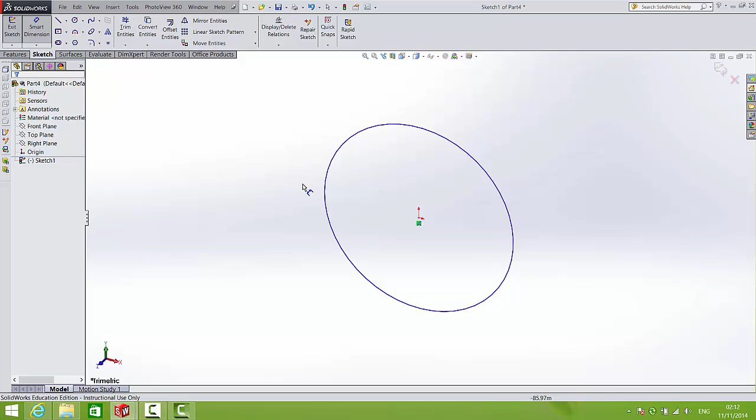So I've opened up a new part and we're going to draw the lid in this part. To do so, we'll draw a circle. Dimension that circle to be 150 in diameter, and we'll extrude that to a height of 35, but with a taper or draft of 2 degrees.

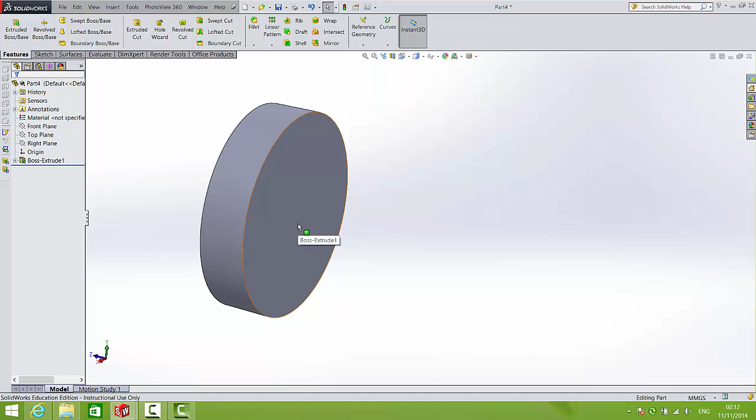So this is the blank for our lid. We want to use a copy of our existing torch and thread to cut the thread in this lid. So to do that, we'll insert the torch with its thread. Go to Insert, Part, and select the torch that you want to bring in.

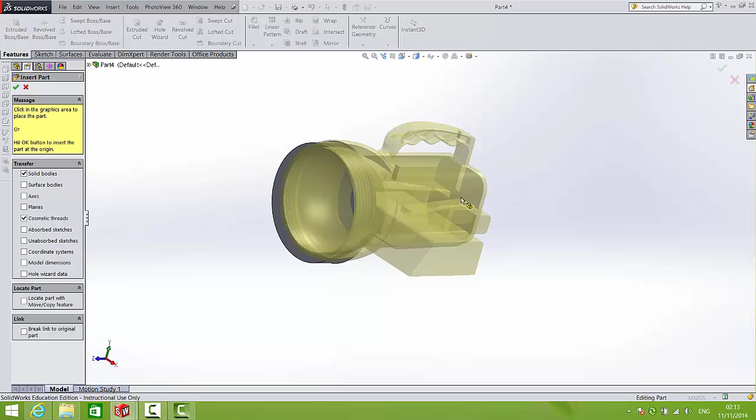If you're very careful, it will snap into position, but you have to be very lucky for it to snap into position, so I tend to just leave it to one side and carefully put it into position. You will notice that all the bodies come in, including the two bodies we used a while ago, but that's not going to be a problem.

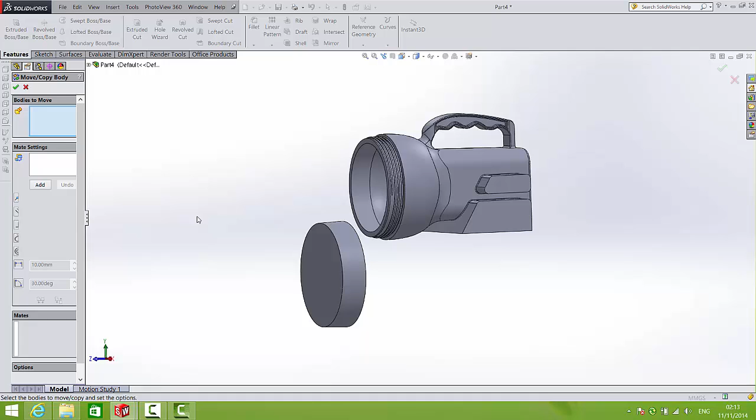So we essentially have to mate these two together. To do that, we will go Insert, Features, Move Copy. First the body to move will be the lid, and the mate settings - by clicking this box, it allows us to apply the mate settings. If you happen to see this menu box, it allows you to move and drag the lid using the XYZ coordinates, but press constraints to go back and apply a traditional mate.

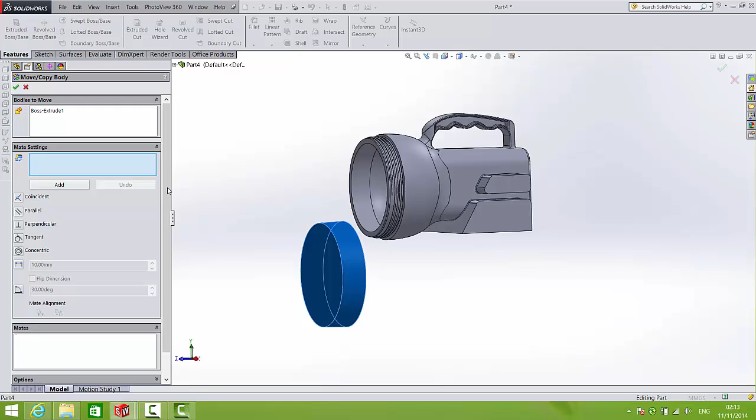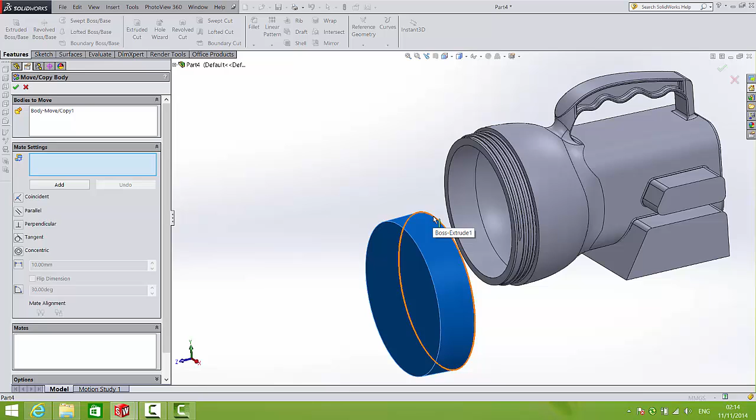So what we can do now is select this face and that face, and they should mate together, which they have done. Now we need to go to the process again, Insert, Features, Move Copy, and now I want to get this body moved, and I will mate the edge of this with the edge of that, and now the torch and the lid have been stuck together.

But bear in mind, this is not an assembly, this is the lid - this is the part called the lid. So I want to cut these solids out of it. To do so, Insert, Features, Combine.

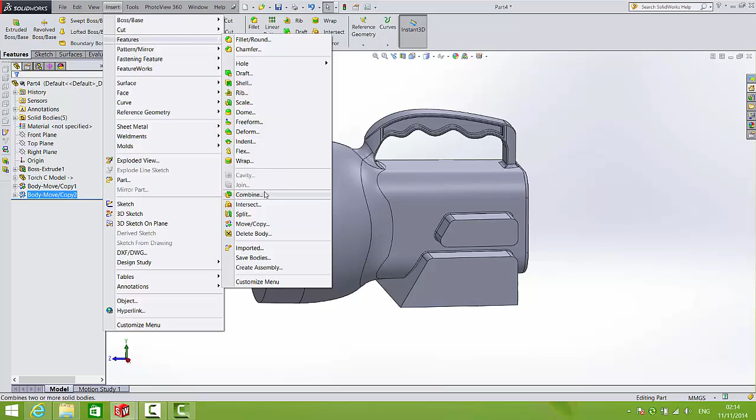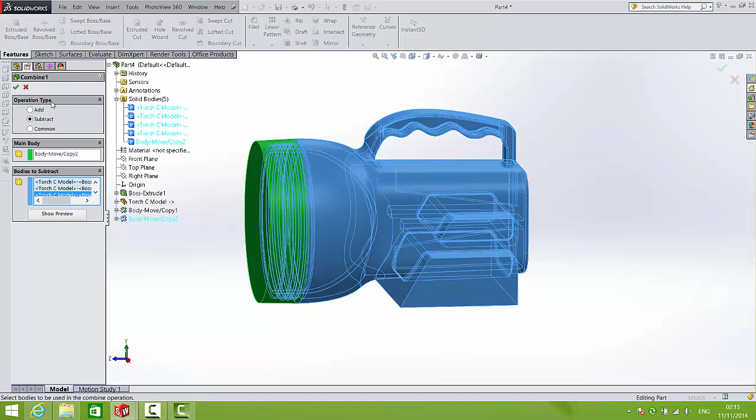I'll make sure it's on Subtract. The main body is going to be the lid, and the bodies to be subtracted will be the main torch. I can't forget these two other bodies as well, and there's the lens inside that I need to remove too. I can't actually click it here, so from the drop down menu I can select the lens within the body. And now if I approve that...

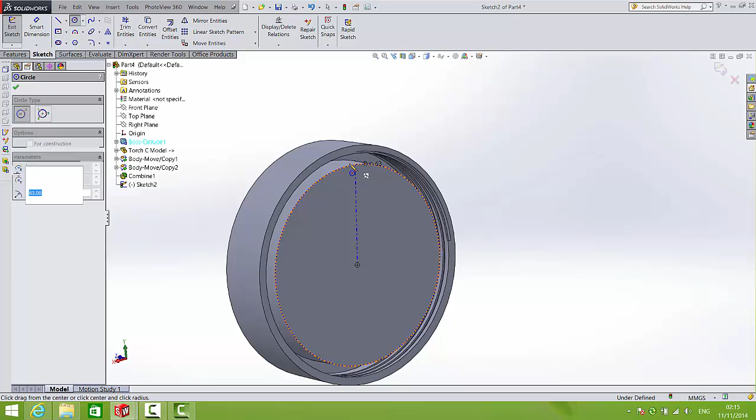I should have the thread, the functioning thread, cut from the lid. So what I'm going to do is create a sketch on this surface of a circle, and I'm going to extrude cut that all the way through.

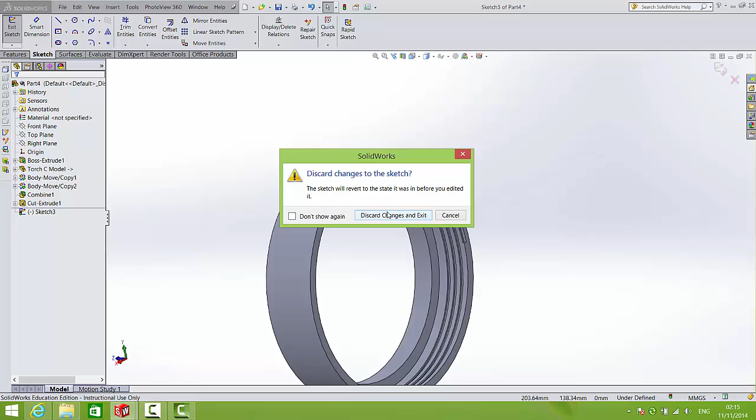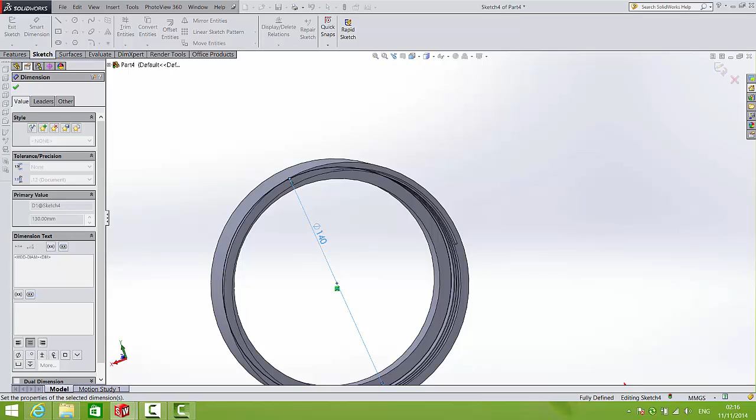Now while I'm at it, I'm going to make a little recess or rebate for the piece of glass. To do that, I will go Sketch, Circle, select this internal plane. That didn't select correctly, so I'll try that again. I'll select the plane first this time, draw a circle on that plane, and let's make it a nice even measurement - let's make it diameter 130. In fact, let's make it 140. See how it looks? 140 is a little steep, let's split the difference - let's make it diameter 135.

And we will extrude cut that to take the piece of glass. Let's say the glass is going to be 3mm thick. There is a little rebate to take the glass.

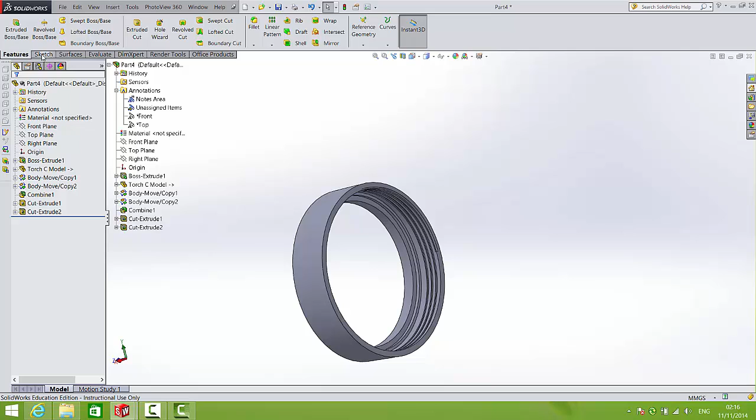And while we're at it, let's draw in the piece of glass. So Sketch, Circle, on the same plane - let's draw the piece of glass there. This time we will extrude it the same distance, but if we want this to be glass, we will not merge the result, and in a few moments' time we can make this body glass.

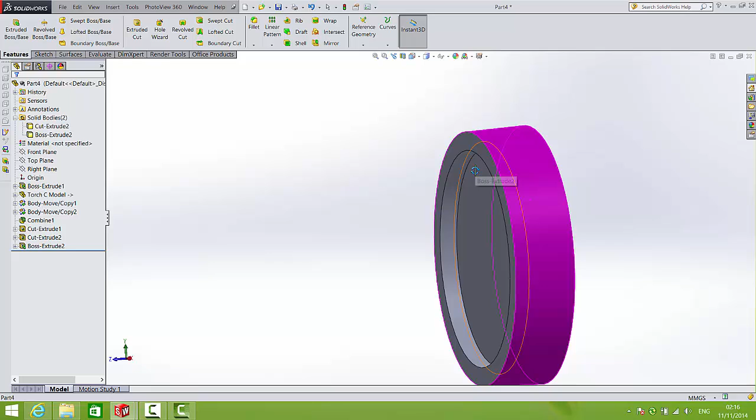So let's put a chamfer on this line here. We'll click chamfer and do a distance chamfer, and let's try a 6 and a 3 and see how that works. Not bad at all.

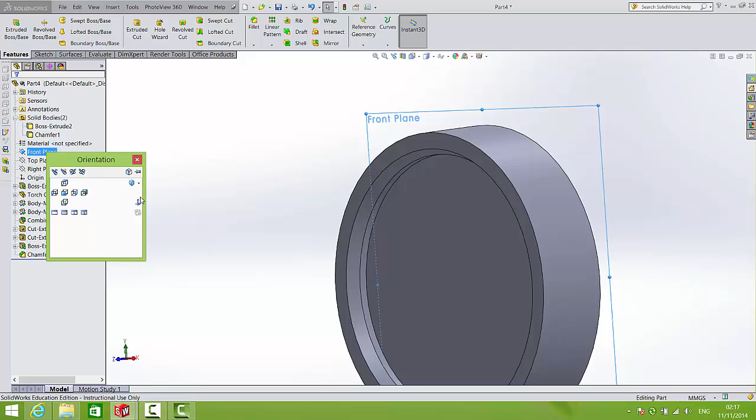And let's just get a little bit of detail up here. So on the front plane - I beg your pardon, it's actually going to be the, let's see where we're at, the right plane. Now no matter, I just notice here that the right plane is shifted. This happens sometimes when you move bodies around, because I moved the lid from the right plane.

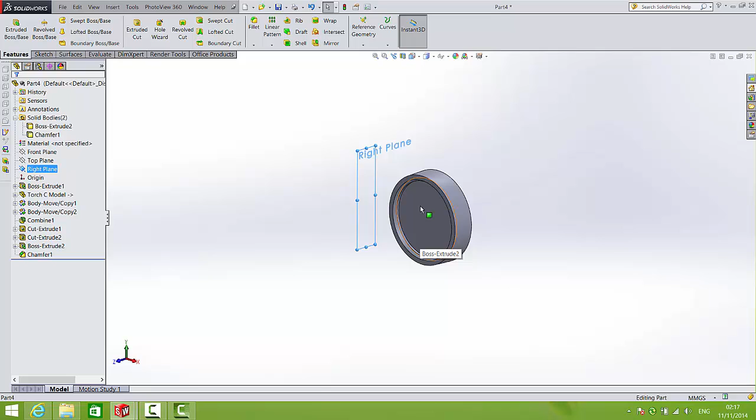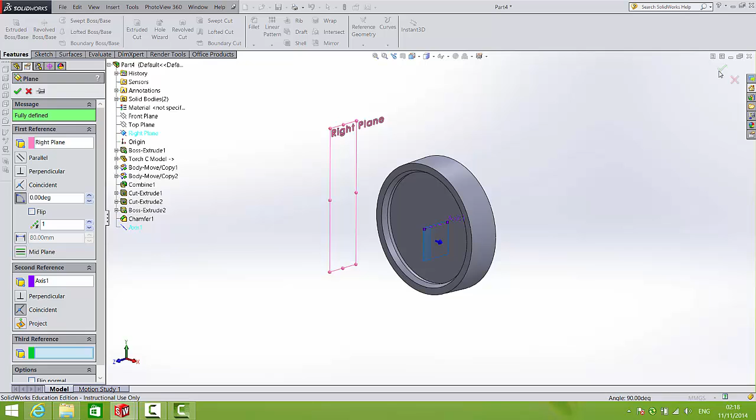So I'm going to need a plane through the center of this. First of all, I'll insert an axis, and now I'll do Reference Geometry, Plane. I'll use the right plane as one reference and the axis as another reference, and I'll just change the angle to 0. That should put a plane, and it does, perfectly through the center - I essentially made my right plane again.

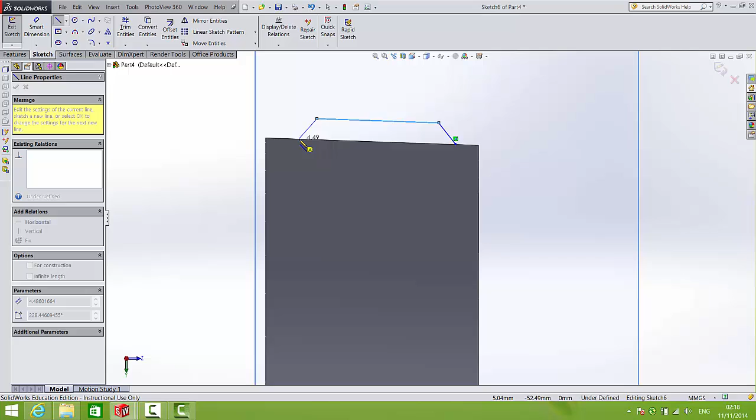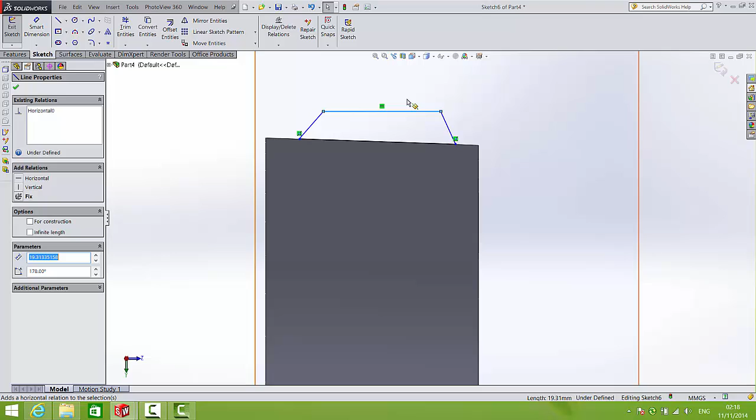So on that I'll create a sketch. It's upside down, but I'll draw it up here, and that sketch is going to look something like this - it's going to maybe start in here, come up at a slight angle, come straight across, and come down. Now I'm not going to overthink it, and I'm not even going to dimension it in this case. I'm just going to make this horizontal - it's already horizontal, so I don't need to do that. In fact it's not horizontal, it just inferred a constraint. Those two lines are parallel, so I can delete that and make that horizontal. So there's a little sketch.

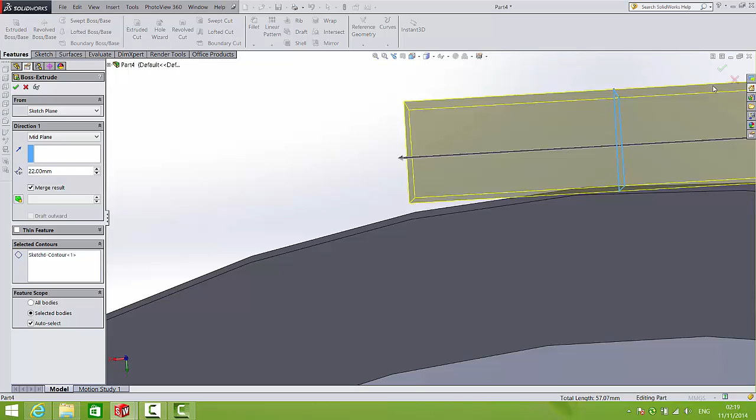I want to make a little grip on the end of the torch. One possible way to do that would be to extrude it, but unfortunately if I extrude it, even mid-plane, you can see it will break contact and leave a little gap there. So rather than extruding it, I'm going to revolve it.

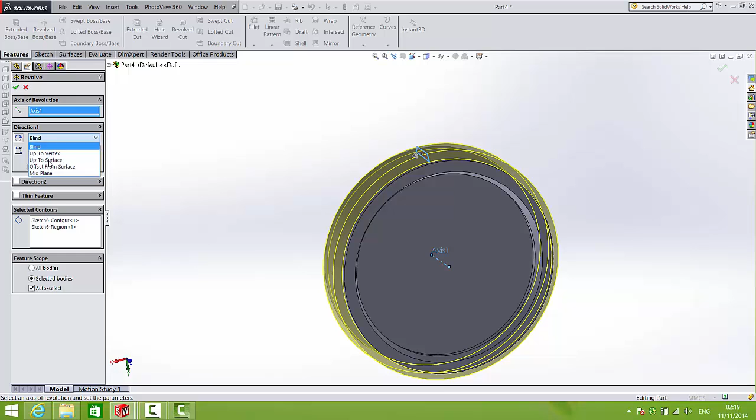I'm not going to revolve it about the bottom, I'm going to revolve it about this axis. First of all I'll select that profile, and the axis is going to be this axis, and you can see it's doing a full revolution there - I do not want that. I want it to be mid-plane, and let's just say 12 degrees, and that looks okay. So that's a little notch on the top of the torch.

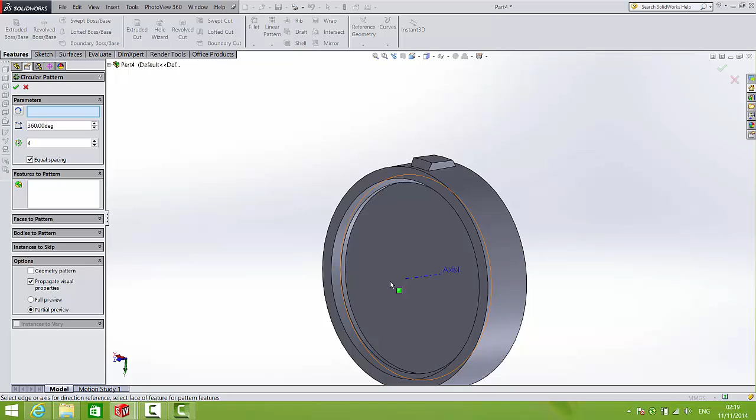Now you could add fillets as you see fit all the way around there, but we'll leave that till later. So we'll now do a circular pattern around this axis, and we'll select this feature, and we'll see how many looks okay - I'm guessing about 8 or 9. In fact 12 looks okay, so let's put in 12 of them.

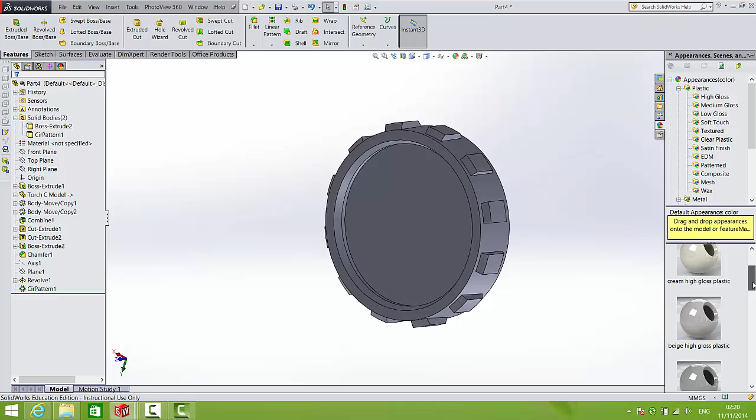So that is essentially the lid. I mean, there's not much more complexity you can add to it. While we're here, we'll open up appearances, put on high gloss black plastic and drop it onto that body. We will put on glass or perspex if you want to that body, and there is the lid completed. So we'll save that.